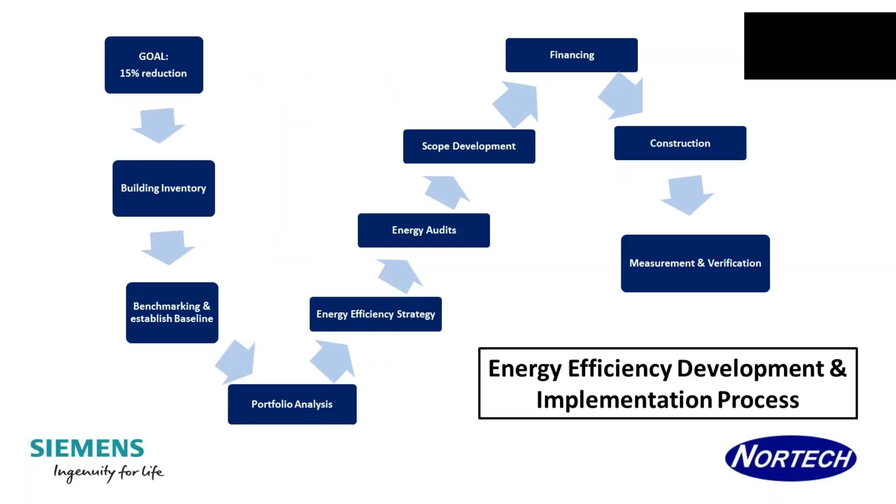Two other presenters, Lee Bowling from Kaufman Engineers and Jim Fowler from Energy Audits of Alaska, went through this first part, and it helped define why you should be interested and what your goals should be regarding energy efficiency. And they talked a little bit about benchmarking your facilities, setting up baselines, doing some data analysis, and developing your project. Today we're going to focus on what happens after you know what your project is and how you are going to finance, construct it, and validate that your savings are met.

So again, part 1 was this preliminary work, and now we're going to transition into part 2, which is the back half where work actually gets done.

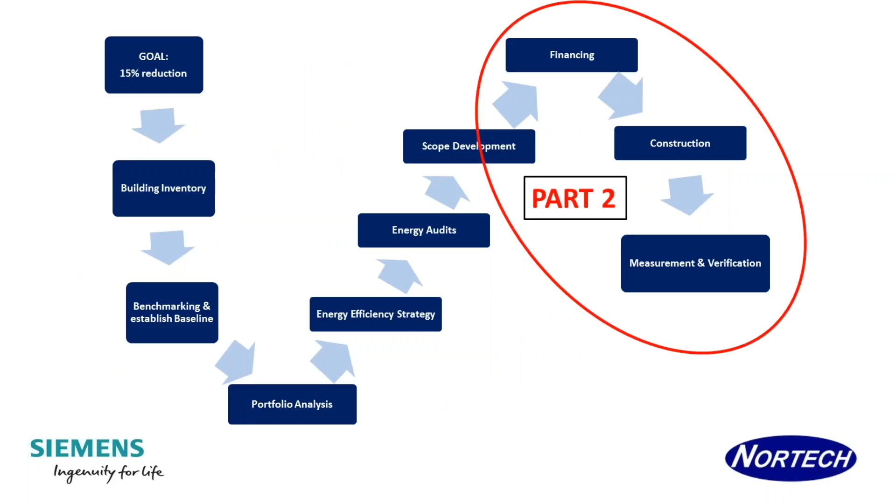So again, these are the 3 questions we're going to try to answer today. We know what we want to do. How are we going to pay for the improvements? How are we going to get the work done? And how will we know if we actually achieved our goals regarding energy efficiency?

All right. Let's see. And I am having difficulty controlling my slides.

All right. So starting off, I want to talk about project financing. So the first few are probably ones that folks are aware of. If you have a project you want to get done, the first thing you look at is, do I have the money to do it? Owners are going to look at their existing capital budgets and maintenance budgets to see if they can self-fund the project. In today's climate, that's pretty hard to do.

The second way would be to pursue state or federal grants and appropriations. 5 years ago even, this was very lucrative. You could get grants for energy efficiency. There was the American Recovery Act. There were a lot of other programs out there. At this point, that's, again, a well that has somewhat dried up.

The third way of securing project financing would be to look to lenders that you have existing relationships with, community banks and credit unions, other third parties, like, for example, Bank of America is one that we've worked with. They actually have a $50 billion environmental lending goal for green projects, and they want to lend that money over the next 10 years. So they're very interested in funding these kind of energy efficiency projects.

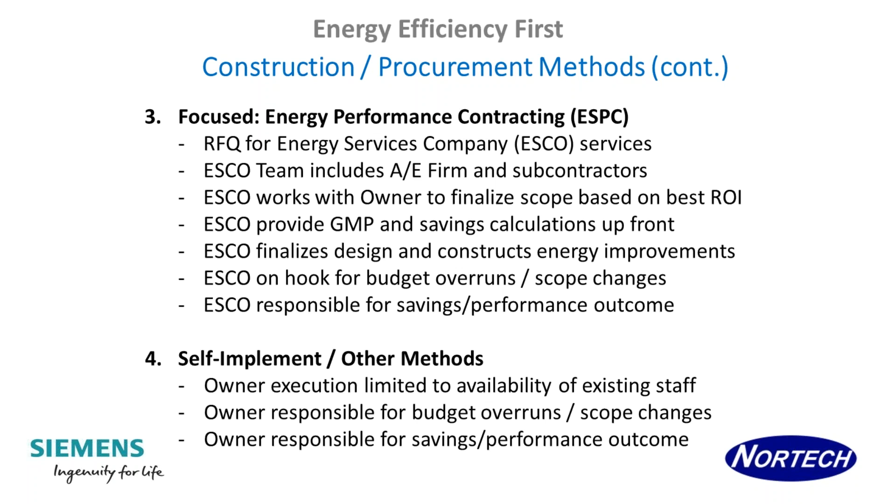The last way that owners sometimes construct these energy efficiency projects is to self-implement them. The challenge there is that the owners are limited to the availability of their existing staff, and if costs go over or there's scope changes that they can't accommodate, they're responsible for that as well. And in addition, they also have to be responsible for any savings or performance outcomes and/or deficiencies.

It's just simplified. Essentially, if an owner decided to work with an ESCO, the first step would be to learn the owner's goals and to do some feasibility analysis. The owner would then typically put out a request for qualifications to select an ESCO partner.

Once that happened, we would proceed with doing an investment grade audit and technical proposal. That's the detailed analysis part. Once you had your fixed price and savings, you could secure financing because you'd know what your payments could be and the term that you needed to go on your loan.

Construction would be awarded. The ESCO would then implement the program. Once the program was completely constructed, then we would enter what they call the energy savings guarantee period, and the savings would be validated with measurement and verification services, which is what Peter's going to talk about.

So just two more slides here. I wanted to let any rural community members on the phone know about 2 statewide assistance programs that will help you procure energy efficiency project services. One is the Alaska Department of Transportation and Public Facilities Energy Office.

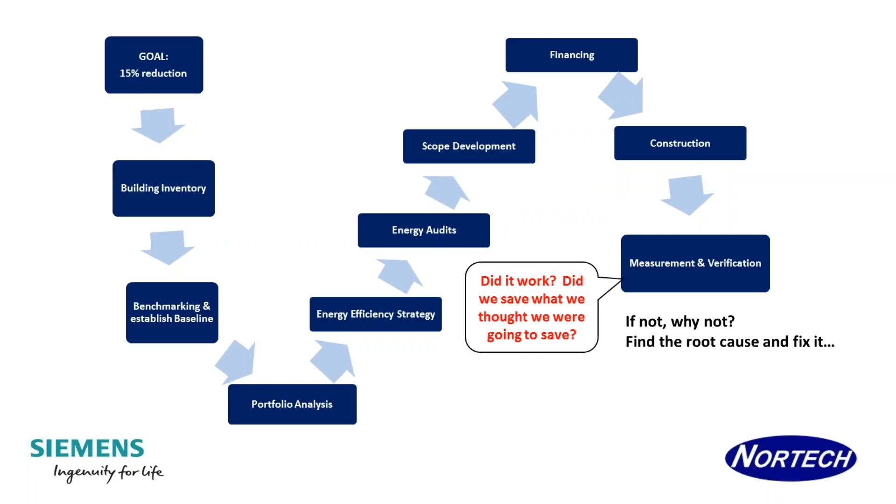The main question we have is, did my slide advance? There it goes.

All right, so the main question we have after we've done an energy efficiency project is, did our energy efficiency project work? We like to remind people to focus primarily on energy use, because energy costs vary based on the cost of fuel, the cost of delivering fuel, and other market conditions. So cost isn't the best measure, but energy use is. Are we using less electricity? Are we using less heating oil, natural gas, or even wood?

And the main thing we want to know is, what is our building doing? When we are there, we have a pretty good idea of whether the lights are on, whether the temperature is comfortable, but what is our building doing when we aren't there? Do we feel like we have control of the building systems now that we've done our energy efficiency project? Are our occupants more comfortable? Are we getting fewer complaints from our occupants about either being too hot or too cold or too drafty?

Are we having fewer maintenance calls? Do we have fewer leaks? Do we have less lamps out? Again, less drafts, things like that. And are we spending less repairing fixtures and equipment? What I'm going to focus on in this talk is the actual measurement of the electrical and heating oil loads. Those are things that we as engineers are very focused on because we can measure that. We get nice graphs. The other things like the occupant comfort, maintenance calls, those are things that building managers really have to focus on themselves over time and just get a feel for how their building's operating.

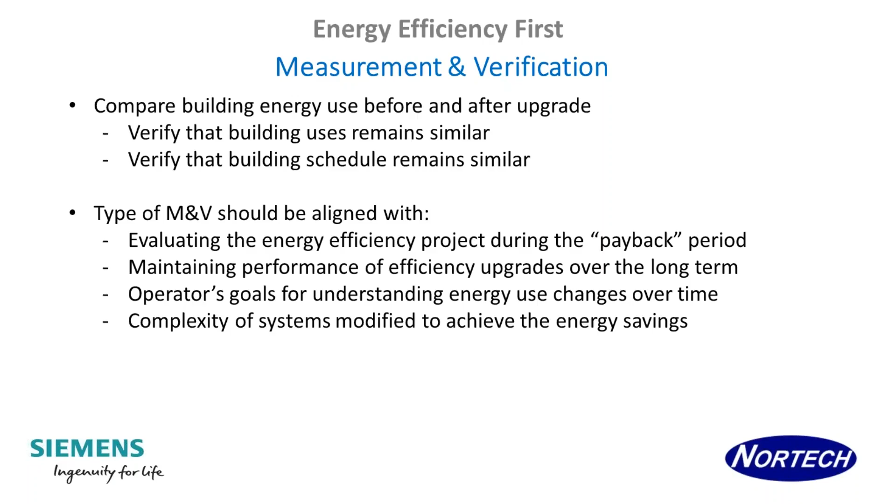If you're putting in a complex control system, then you should have a measurement and verification system that is aligned with that so that you can measure the changes that you've made, the fine-tuning you've done of your building. The lighting upgrades are an example of something that's actually a fairly easy energy savings modification, and it's also easy to measure with your monthly utility bill from the power company. So there's several different ways to do measurement and verification. I'm going to run through them here fairly quickly.

So you can do measurement and verification through evaluation of the monthly or periodic bills. This is basically a continuation of the benchmarking that was done during the energy audit. This is a straightforward process. For most entities, they can either get the bills directly from the electric company or the heating oil provider or the natural gas company, or from the accounting department of the owner of the building.

This is routinely performed by ESCOs to document the contractually guaranteed savings. It's required by several different funding programs, the AHFC program, the USDA program, and some others. It may be required by a private bank or funding source, and it's great documentation. When you stack up the year before the energy retrofit and the year after the energy retrofit, and you can see that the graphs are lower, you can get a lot of buy-in with a fairly simple graph.

Electrical use is usually directly comparable. You take out either an incandescent lamp or a fluorescent lamp, replace it with LED, the electrical use goes down, and there it is every day, every hour the light's on, and on a month-to-month basis it's clear.

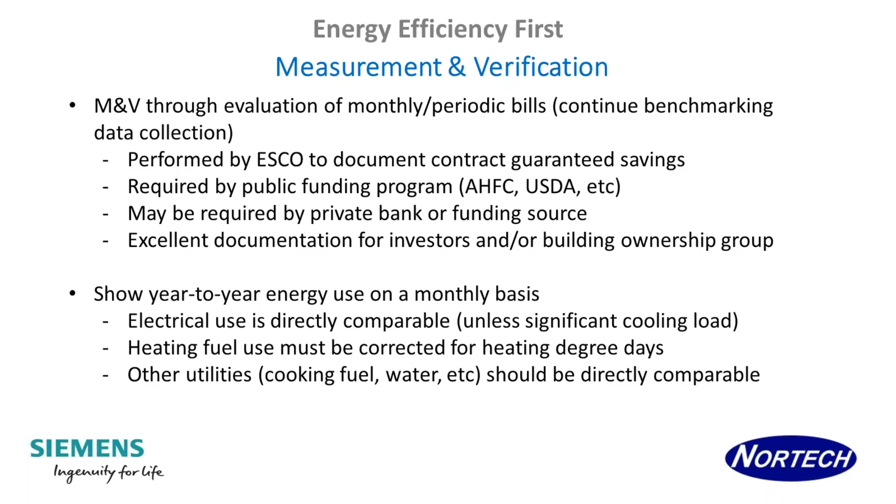Heating oil and wood and other heating fuel is a little bit more difficult to measure and show year-to-year differences. This must be corrected for heating degree days because you can have a relatively mild winter, and that'll make it look like you saved a lot of heating fuel, and you did. But it wasn't because of the energy efficiency upgrade, it was just because there was less heat necessary for the building. Other utilities that are a little less common to address in energy audits are things like cooking fuel, propane, for example. Water, those should also be directly comparable as long as the building use has remained comparable.

To get slightly more detailed data, building owners or maintenance staff can do their own recording of major building systems periodically based on what they want to know about their building. Sometimes energy efficiency upgrades will include a new boiler with hour meter or other measurement device that isn't necessarily recorded on a continuous basis but can be read off the meter itself. Also monitoring the fuel level in tanks. A lot of times these can be measured on a weekly basis.

The electric meter from the utility can also be read, and you can put hour meters on other major electrical consumers, air handlers and the like, and get an idea of whether the units are operating more or less than they used to.

This also helps the maintenance staff in determining when maintenance needs to be done. Boilers should be maintained at certain intervals. Filters need to be cleaned on certain intervals. And when you switch from a continuously operating system to an occupancy controlled system, for example, your filters will last a lot longer because now your units are only running 10 hours a day instead of 24 hours a day. So having those kind of meters on there is handy. Having it written down is handy, and it helps maintenance staff in particular with the periodic maintenance that's necessary. And a lot of times you can see a reduction in run hours and the like.

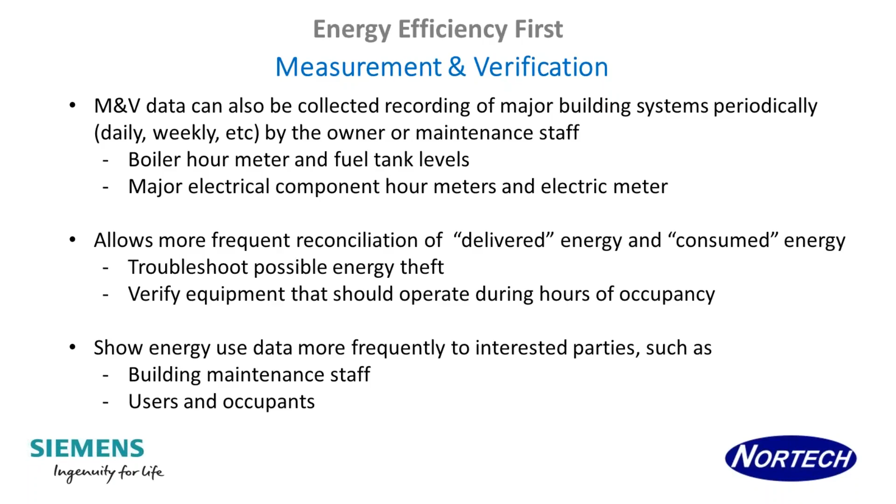It's also good for users and occupants to see. There's some schools here in Fairbanks, and one of the libraries has an energy use dashboard where folks that use the building can see differences, and they can make efforts across the school to try to reduce their energy load, and then they can see if they were successful.

What I'm going to show you slides from is from a continuous trending of equipment temperatures and other data. This is common with more complex systems where there's sensors that are controlling occupancy sensors for lights and demand control ventilation.

The easiest way to do this is often through the existing building control system. Those systems can be set to collect the data frequently on whatever interval that folks are interested in. Sometimes getting the data out can be a little bit difficult, and graphing it can be a little bit difficult, but collecting the data is the important part.

There's also third-party monitoring systems that can be used. They're basically what I like to call clamp-on systems, where you can just walk into a building, put these sensors on for temperature and electrical load, and start collecting data immediately.

These continuous trending can be used to verify a wide variety of information, equipment schedules are matching occupancies. Occupancy and photo sensors are working and controlling the systems that they're supposed to control. And things like temperatures are recovering from nighttime setbacks. Also, the temperatures are maintained during occupancy, or if your building occupancy, like an office building, actually produces a lot of heat, so you can sometimes measure those differences as well.

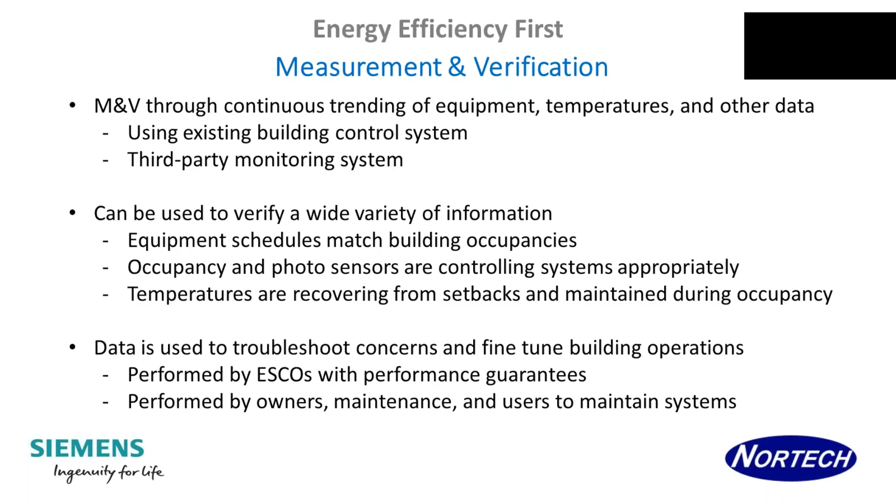The data can be used to troubleshoot concerns and fine-tune building operations. I think that ESCOs with performance guarantees are good users of this because they're on the hook, you know, to make sure that you save the energy that they have guaranteed you, and so they'll help fine-tune your building so that it's working the way that they expect, and that your energy use is reduced. This can also be performed by building owners, maintenance staff, and users to maintain systems and troubleshoot systems.

So now I'm going to run through a couple of case studies and talk about the different ways measurement and verification can work. This first one was a traditional design bid build we did with Tri-Valley School in Healy. This is the graph of actually the energy cost for this building.

They had a coal boiler and an oil boiler. The coal boiler heated about 3/4 of the school. The oil boiler heated the newest quarter. It was put in when heating oil was fairly inexpensive and operated for many years, and then when we did the audit, we realized that the coal boiler had significantly more capacity and could heat the whole school if they connected it to the heating system in the elementary wing. So a heating loop was installed.

Unfortunately, this actually doesn't really reduce the energy use significantly, but it reduces the energy cost through direct displacement of heating oil. The measurement and verification on this is going to be pretty easy because they're just going to use less heating oil. At least that's the plan. Every BTU of coal heat they put in should reduce a BTU of heating oil. Continued benchmarking probably on an annual basis is appropriate for this.

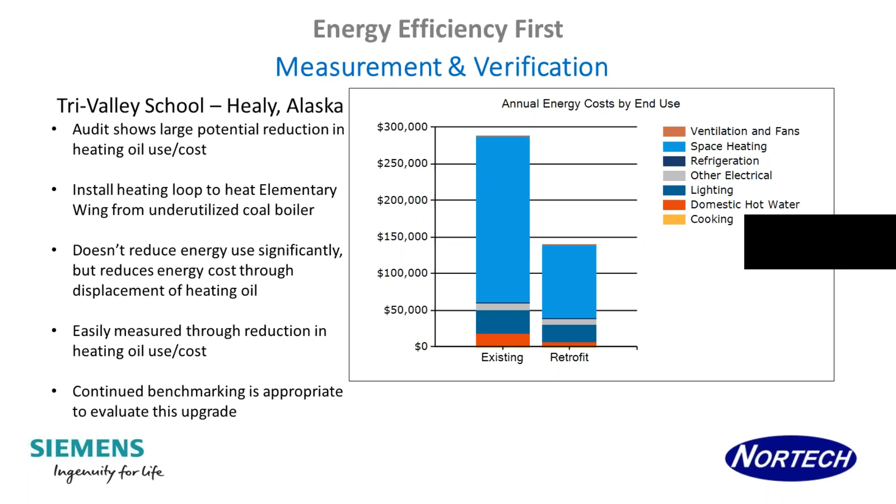We haven't gone back and looked at this yet because this was just put online in September. So we don't have data on how much fuel consumption has actually gone down, but this was a good project, and you can see that the payback here is going to be fairly quick. It was less than 4 years, and this was a $275,000 capital improvement project that they did.

In order to get this building back down into the lower level where we thought the use should be, we recommended doing existing building commissioning to identify things that were not being controlled the way they were designed, and basically bring the building back to its original operating standards. This process took several iterations because first we had to go find all the systems, then figure out if they were operating correctly, figure out if the controls were working correctly, the control sequences were working correctly, replace and repair things that were not working correctly, and then go back and do it again.

During this effort, we installed and replaced missing and failed sensors. We reprogrammed the scheduling so that the air handling equipment was off during unoccupied hours. We programmed the heating system pumps and motors to be off when there was no heat requested within the building. Probably after scheduling the air handlers, the next biggest savings was to repair the broken outside air dampers so that they limited the intake of fresh air to what was needed instead of being fully open. And we programmed setbacks for unoccupied hours and weekends and holidays.

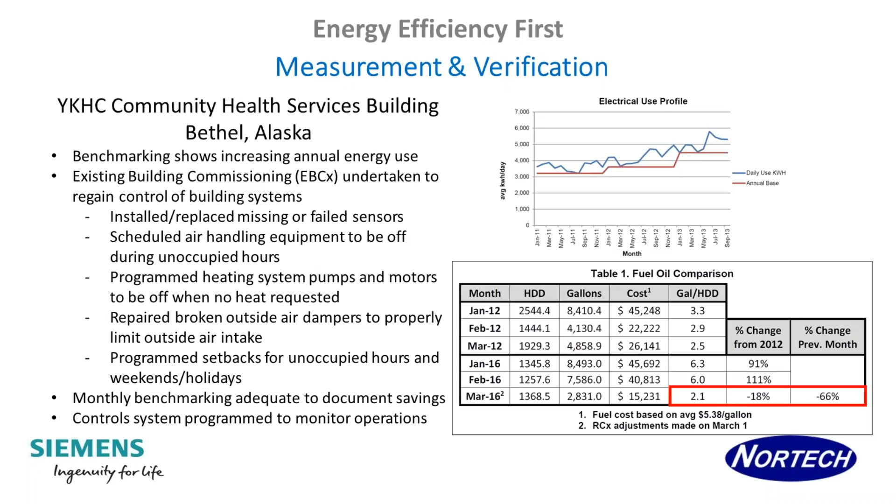So the rest of my slides are about our own building here. We used the last option Amber discussed. We self-performed this, where, you know, we're engineers and we think we know something about project management, so we undertook multiple energy efficiency and renewable energy upgrades between 2011 and 2016. In 2012, we did the electrical. We replaced all our lights with LEDs, and we did some work on our

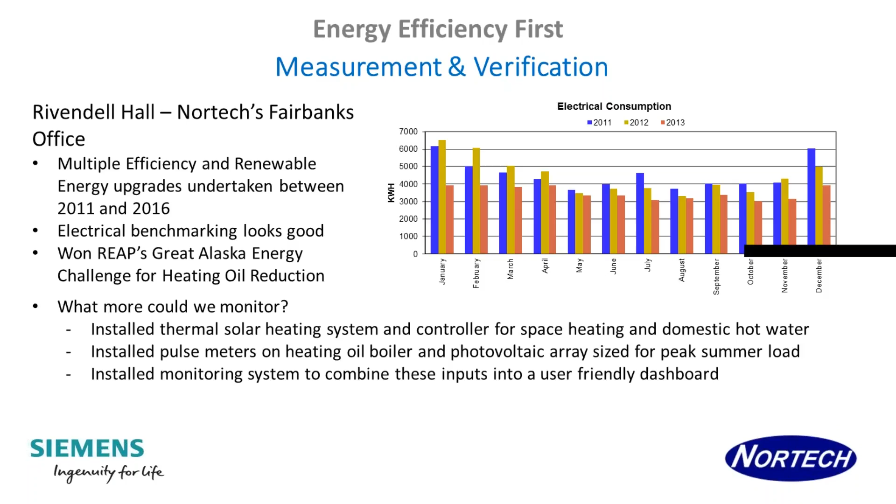But as I said, we're a bunch of engineers, and we said, well, what else could we monitor? And what else could we install? So we installed a thermal solar heating system and controller for space heating and domestic hot water. We installed pulse meters on our heating oil boiler and on our PV array that we installed to generate electric for our peak summer load. And we installed an additional monitoring system. Once we had those systems going, we realized that it was nice to look at each one individually, but we wanted to try to find something that let us look at all that together. That's what the upcoming slides are.

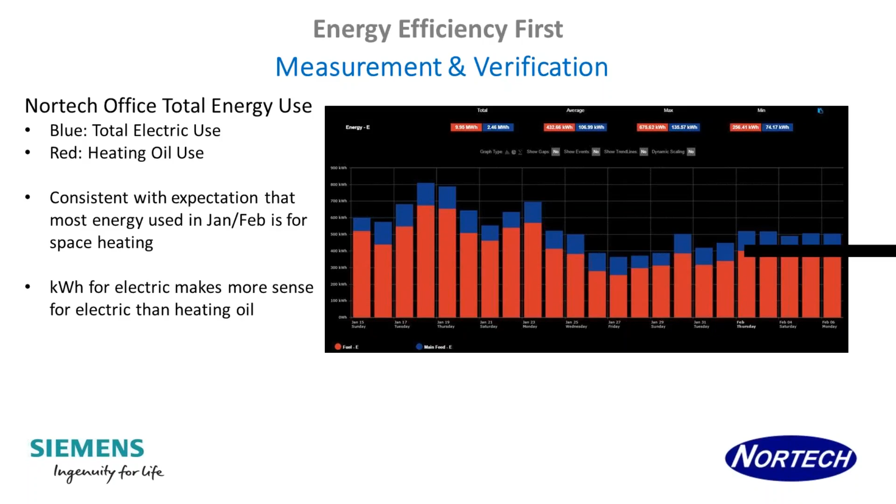So this slide here is our total office energy use. This is on a daily basis for the last half of January and the first half of February of this year. It's consistent with the fact that we would expect to use a lot of energy this time of year. It's cold and dark, and here's our total building energy use. The red is heating oil, the blue is the electrical load, and heating oil is a lot higher than the electrical load. This is measured in kilowatt hours, which doesn't make a lot of sense for heating oil. So we wanted to look closer at the heating oil.

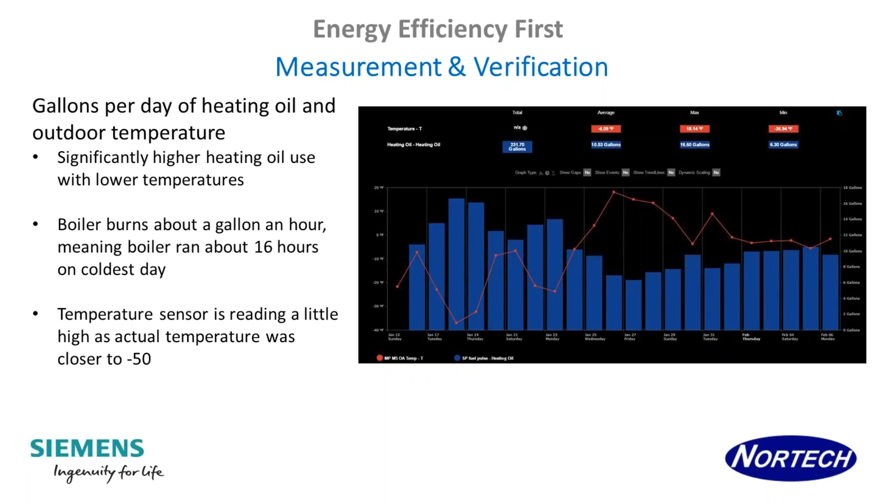We also measured this in gallons. We wanted to make sure, okay, is our building behaving the way we would expect it to? So we have gallons of heating oil on the right, the outdoor temperature on the left. You can see the heating oil is the blue lines, and when it's cold, down in the -40 to -50 range, we burn twice as much heating oil on a daily basis as we do when the temperature is more up in the 15 to 20 degree range. So this helps us understand that our building is operating within our expectations. It also shows us that on the coldest days, our boiler is running 16 hours a day. That's pretty good utilization for a boiler.

This system also lets us monitor temperatures across a variety of things. I won't go too deep into this, but as you can see, there's six temperatures. What this shows us is that the bottom line is the outdoor temperature in the same period of January 15th to February 6th. The upper line is our boiler temperature. You can see as the temperature goes up, our outdoor reset is working, so our boiler temperature is actually going down, so that's saving us energy.

The difference between the top two lines is showing us that our building is having less demand for heat as the temperature goes up, which also makes sense. The second line from the bottom is the room temperature of our main office where most of our employees work. We have a nighttime setback that you can see is operating on the right. On the left, we turned that off when it was very cold because we realized our building was not capable of recovering from the setbacks, and as the temperature dips off to the right, you can see the recovery time gets a little warmer in the morning.

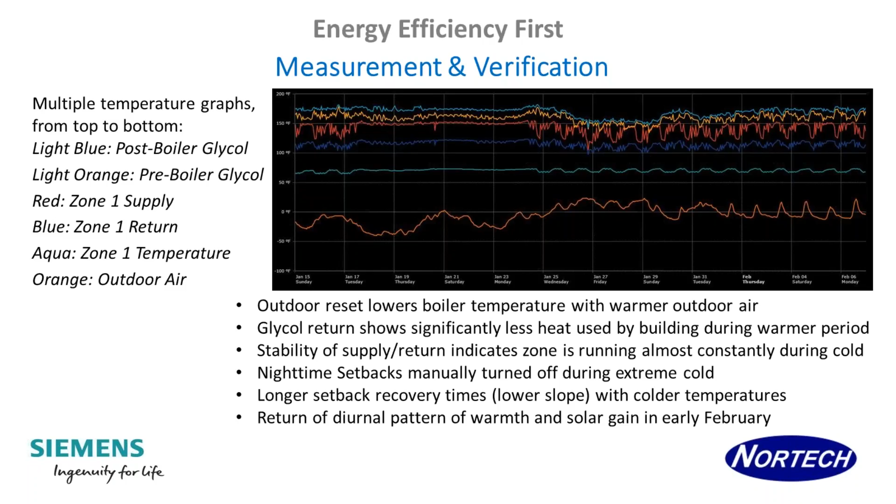One of my favorite things in this graph is in January there's really no difference between day and night. The temperature is just kind of doing something, but it's more related to the weather. When you get over to the right, about the beginning of February, you can start to see the sun actually warms things up a little bit during the day. So that's something we can all feel.

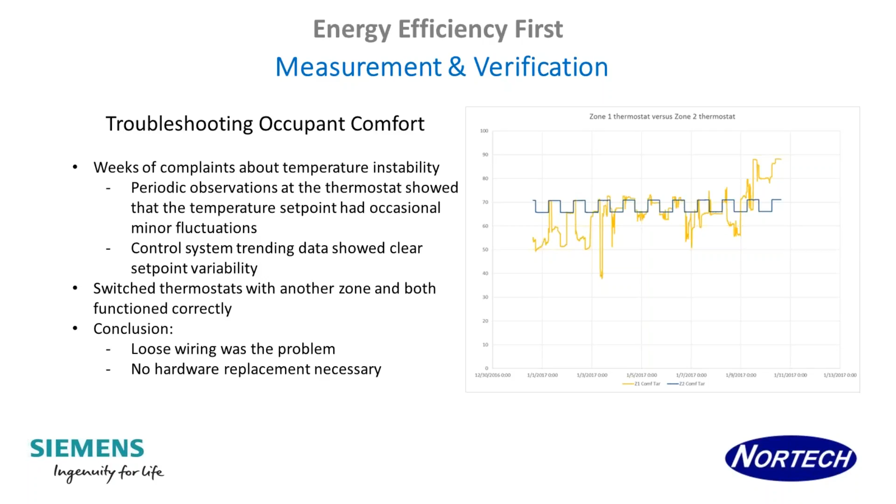We also could use our system for troubleshooting occupant comfort. This graph shows the operation of a thermostat with a setback. It goes down, it goes up, it's a nice stepped line. The yellow line is the thermostat for our main office, where we were having trouble controlling the temperature. We got periodic complaints of, oh, it's too cold. Nobody was complaining that it was too warm. But the yellow line is the temperature that the thermostat was calling for. And we traced that back to a loose wire. As you can see, that's a difficult thing to troubleshoot without continuous trending, because you just have these periodic occupant comfort comments.

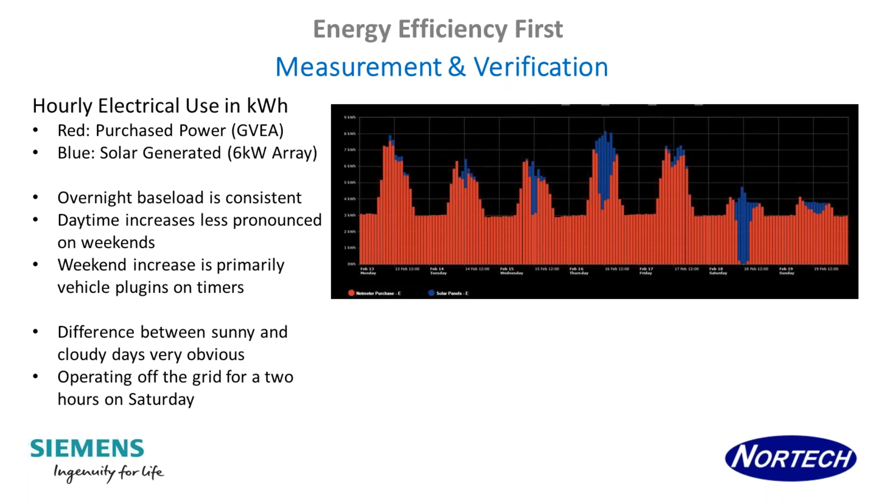And then on the weekends off to the right, those are a Saturday and a Sunday, you can see we were actually off the grid a little bit last Saturday, which is exciting. But then we said to ourselves, well, what's going on the weekends when we're not here? During the day on a weekday, we're all here and computers are on, lights are on. So we went back into our data to figure out where our electricity was going, and I won't bore you with too much of this, but the answer was we have plugins on timers for our vehicles, and those come on and run all day, even on the weekends. So we're going to reprogram those timers.

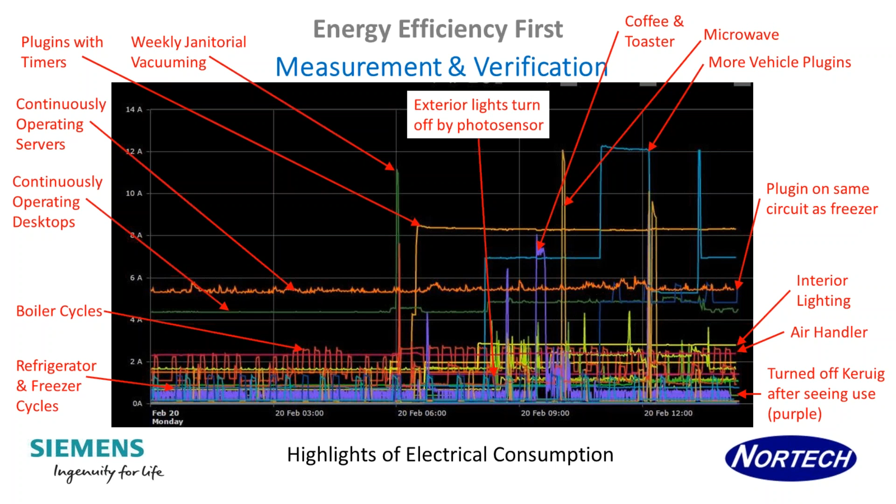In here you can also see our boiler cycles, and there's a purple squiggly line all the way across the bottom, which turned out to be the Keurig coffee maker, which was keeping itself hot day and night, just in case someone wanted a cup of coffee. You can see right at the end on the right, as soon as we noticed that, we turned that thing off. It's not a huge load compared to a vehicle plug-in, but it is continuous.

So measurement and verification are important parts of the energy efficiency project. It's how we discuss what we actually are saving in energy. Continued benchmarking is the easiest thing to do, just continually looking at the monthly bills using a spreadsheet. The original benchmarking spreadsheet is a good thing to do. There's also software such as Portfolio Manager, which can automate the comparison of the post-energy efficiency upgrade to the pre-upgrade energy use, and you can also compare it to similar buildings in the state

and across the country. Trending data can be developed from building controls or standalone measurement verification packages. A lot of times controls personnel or consultants with experience with the specific system are necessary. Trending data can be useful to troubleshoot a tremendous amount of things. It does cost money to get that trending data, but a lot of times you can find the source of occupant complaints within a week or less.

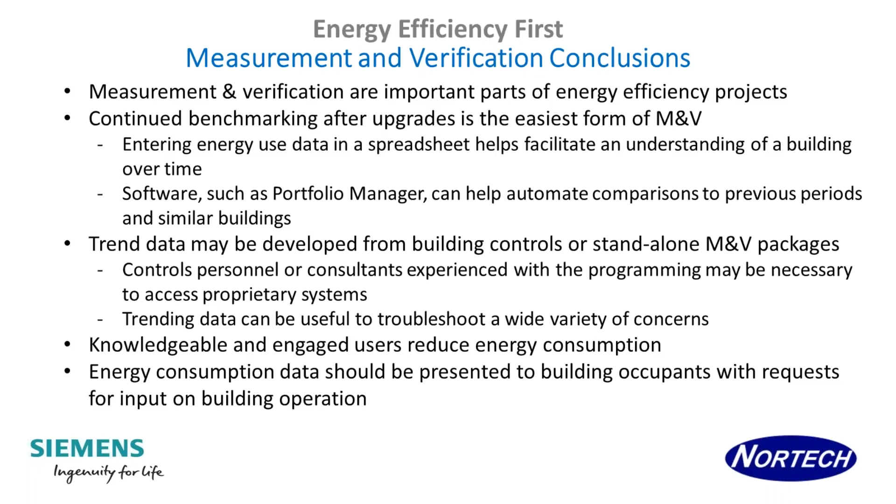Our experience is that, like the Keurig, a knowledgeable and engaged user can reduce energy consumption. All you have to do is turn some of these things off. Desktop computers, coffee makers, and the like. Every little bit helps. And energy consumption data should be presented to the occupants that are interested. A knowledgeable occupant and user is your best step forward to reducing energy consumption.

And then just to conclude with the overall energy efficiency, why energy efficiency and how to move it forward. Auditing and measurement are the key to documenting how much energy a building uses and maintaining the success of an energy efficiency project. You really have to look at the bills to understand what's going on in a building and what you can do about it. And there's really no project that's too big or too small, from replacing light bulbs to replacing air handlers. They all make a difference.

And getting the word out, we were talking about this a little bit before we started the presentation, getting the word out is probably the most important thing that anyone can do to help others. Demonstrate your success, whether it's a lamp replacement, a street light upgrade, exterior light upgrade, appliance upgrades, refrigeration or heating appliances, up to retrofitting whole schools or clinics. Get the success out there. Talk to the folks you know that operate similar buildings and spread the word.

And it's important to remember that energy costs are not controlled by us or the building users, but energy use can be. So whenever you hear people complaining about how much energy costs, and kind of feeling hopeless about it, provide the reminder that energy use can be controlled, and that's the most important part of the bill. How much energy costs can't be controlled, but how much you use can be.